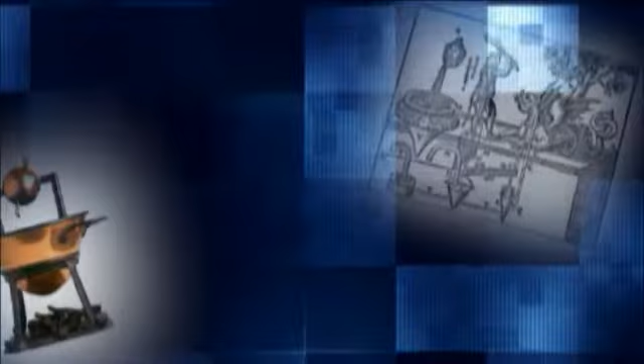Then, in the 1700s, through the work of Thomas Newcomen and James Watt, the steam pumping engine, and thus the modern pump industry, was born. Over the last 250 years, pumping technology has evolved to the highest levels of integrated engineering sciences.

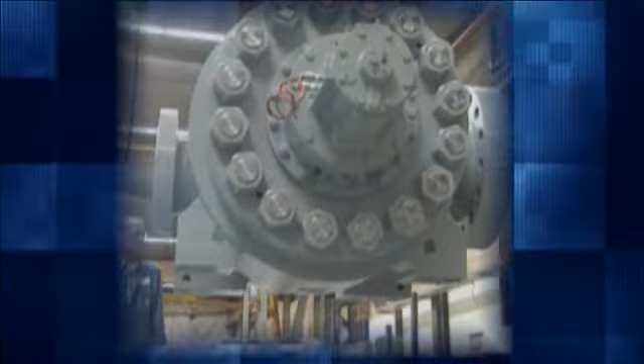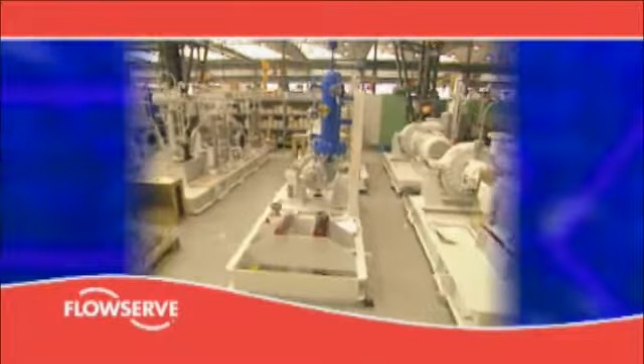If we go back and look again at the heritage companies, which are made up of a good many, the dominant technological skill in all of those companies has been hydraulics. We have a baseline of experience from which we can move ahead. So from that perspective, we're well positioned to move into almost any area of technology.

One of the great things about this company, especially when it comes to technology, is that we have several centers of excellence, which are virtual centers of excellence in various fields. Fluid dynamics is one. We also have mechanical analysis, mechanical design, materials, mechatronics. When anything happens in the field or a customer likes an advice or is asking for something, we are glad to give it, and we tend to step beyond boundaries.

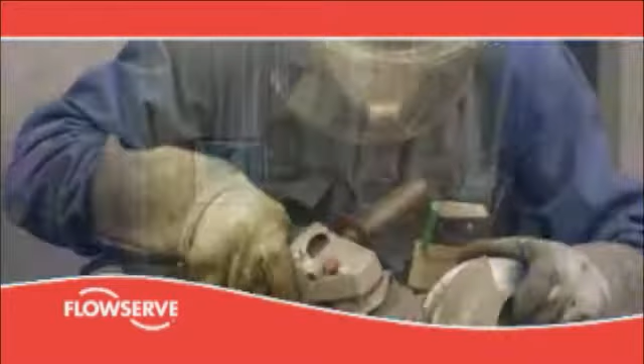The organization these men are talking about is Flowserve, one of the world's largest pump companies. Tracing its heritage back to 1790 London, Flowserve is the undisputed leader in pumping technology, with an exhaustive list of industry firsts to its credit. Most of the engineered pumping machines operating in the world today were derived from original design concepts developed by entrepreneurial engineers from Flowserve heritage companies.

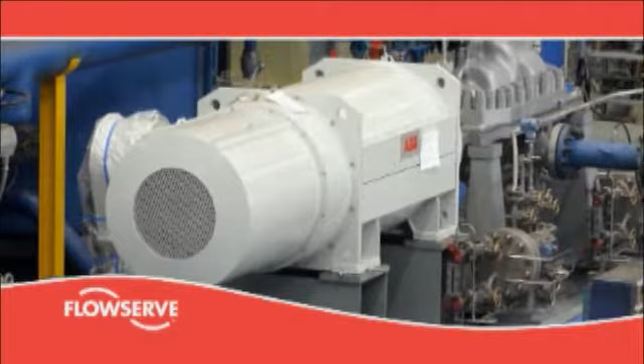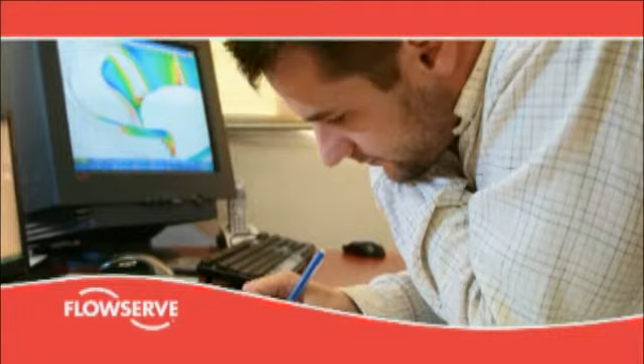Today, Flowserve continues to possess a passionate commitment to technology and innovation. In fact, it is one of the company's core strategies. Through its Applied Technology Group, this research and development expertise in fluid dynamics, mechanical design, engineering analysis, mechatronics and material science is now available to those pursuing creative, innovative solutions to pumping problems.

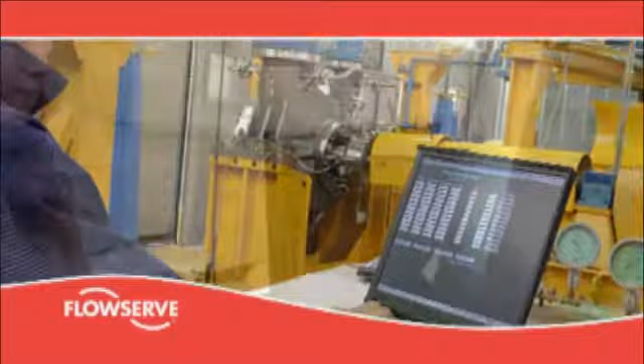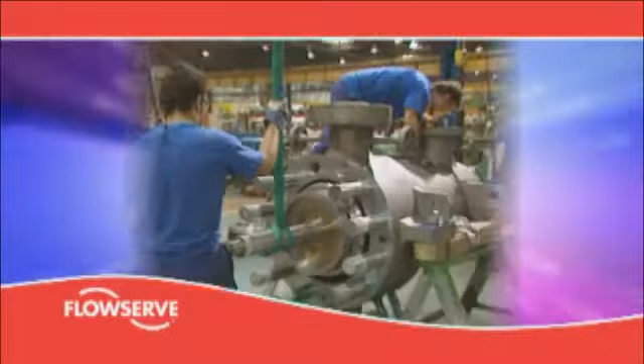If we look at high energy machines, higher speed gives you physically smaller machines. That poses its difficulty though, because you have to get the fluid dynamics correct, and you really have to get them very correct in order to run machines at very high speeds. The main field of interest nowadays is cavitation. It always has been in pump applications and still is. And CFD is a great tool nowadays to study that in more detail.

When doing a cavitation study or an analysis, we try to determine the shape of the cavity that will form. And from that cavity shape or cavity length, we will determine the amount of erosion rate that will come from it. So we know that after 1 year, 2 years, 3 years or 10 years time, we have a certain amount of cavitation damage or cavitation pitting. And that's exactly what the customer is interested in.

It often occurs that customers still require us to do flow visualization tests on high energy applications. Often what the customer wants to see is a limited amount of sheet cavitation to be sure that the lifetime of the pump is guaranteed. We can visualize when an incipient cavitation is happening, when the first bubble is formed, and then take actions to avoid that in the field.

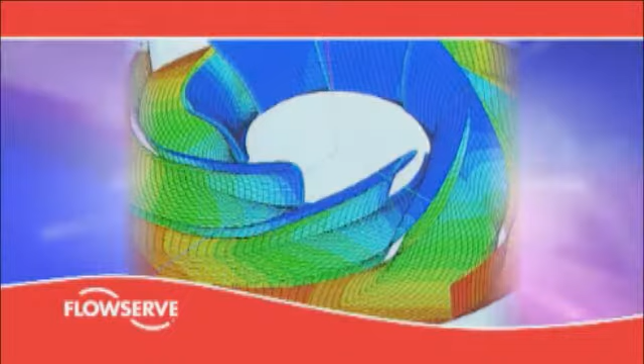We have now coupled the CFD tool with an optimization tool so that together it becomes a design tool. With this design tool, we use parameterized models for the pump impeller that we put into a CFD tool. We start by calculating the flow within a passage. We construct an objective function with the objectives we want to include, and then we try with cutting-edge numerical techniques like a genetic algorithm to minimize this function, so to get the best geometry out of the design space.

The adoption of genetic algorithms in the design process is very important because it enables us to deliver impeller designs that are unconventional and that no one has ever tried before. Customers want to be able to operate their pumps outside of the design envelope. It's whatever the demands of the plant require, and they will operate these pumps in ways that were never envisioned.

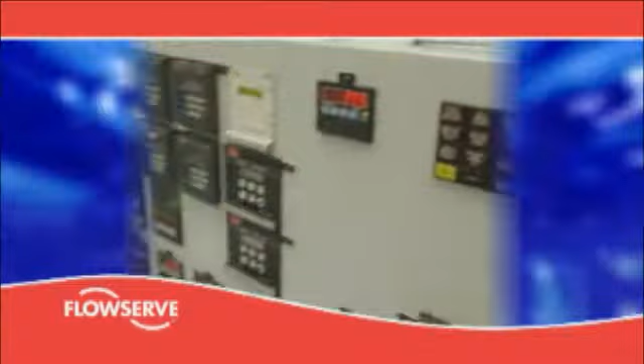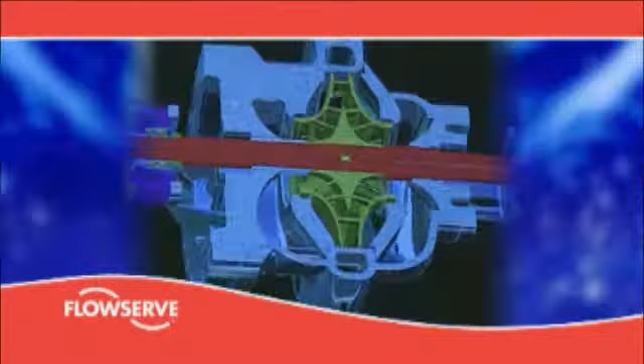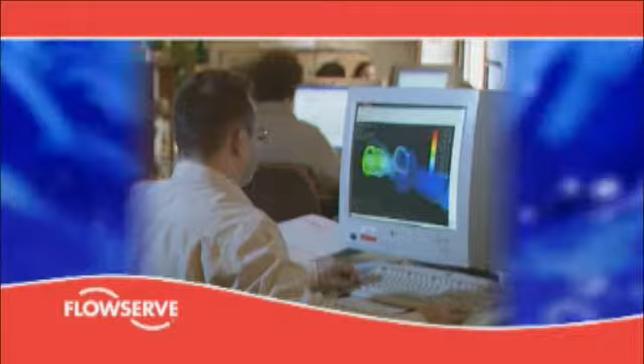The computational tools that we have available today in the company are for sure the necessary instrument to reach more severe limits for application on the highly demanding pumps. With 3D modeling and CFD, finite element modeling and so on, we can actually look at these design conditions in detail. We can actually model them and predict what types of vibration perhaps or stresses or instabilities in the flow may be happening.

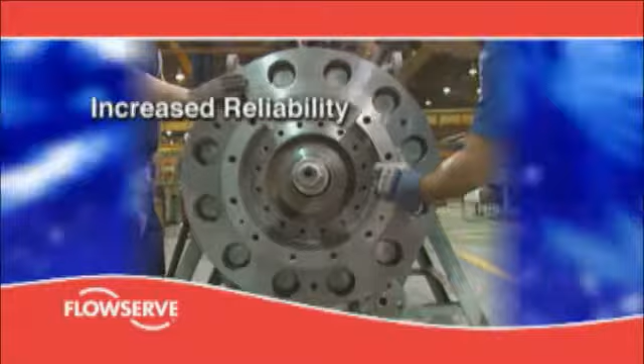We are looking forward to a better fluid dynamic design in order to reduce by 30% and more the weight of the pump and extend the mean time between failure to achieve a longer expected life of the pump.

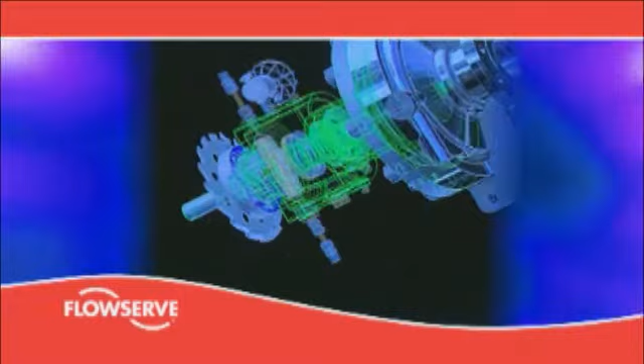The real advantage of 3D modeling is that you can check your assemblies. You can take any 3D model and put all of the loads on it, get stresses, deflection, vibration information, natural frequencies, determine if you're going to have certain field problems in advance, and then you can make modifications to that model and see how you've improved it.

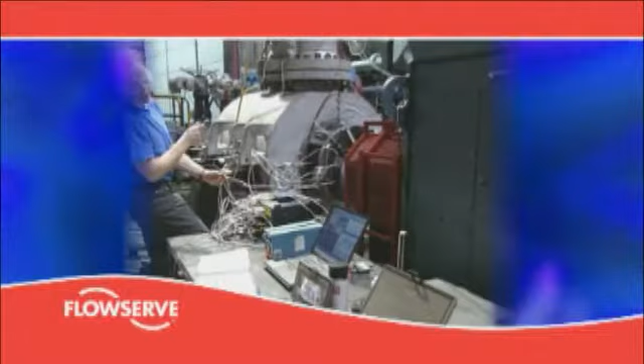All the vertical pumps that we design in our facility, we conduct a reed frequency analysis using rotor dynamics and finite element analysis, which confirms that no problem of that nature is going to happen on a site. That is one of the best things we can do for our customers.

Mechatronics is really kind of defined as a synergistic integration of a number of different technologies, and these include things like electrical, electronic engineering, mechanical engineering, sensor technologies, computer technologies, and actuation technologies. We as pump manufacturers know how the pump works really, really well. So people have tremendous experience in the industry to diagnose pump problems.

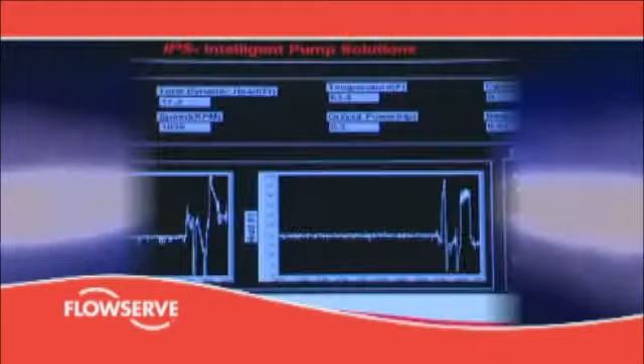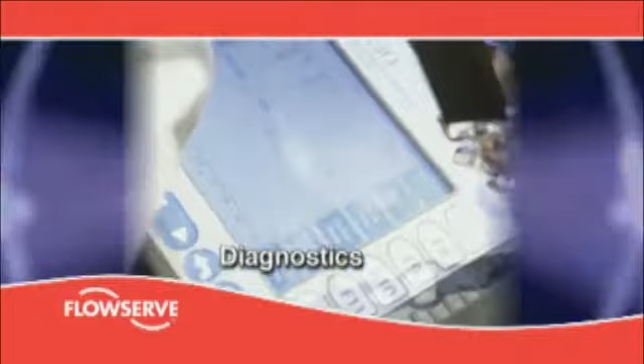With mechatronic systems, what we are trying to do is capture their diagnosis ability or capability to detect problems. We want to actually be able to embed the intelligence directly on our equipment such that the pump itself would monitor its own condition such that you will not have to go out and collect raw vibration data, for instance, from that piece of equipment. The piece of equipment can gather its own data, run its own diagnostic and prognostic algorithms, and give you information about the status of that piece of equipment.

So, end of the day, you come back to saying, what do I need to do all these things? I need to be able to monitor, gather, and collect data, which goes to the heart of the mechatronic system, which is instrumentation, and the ability to collect data and interpret data to the customer's benefit.

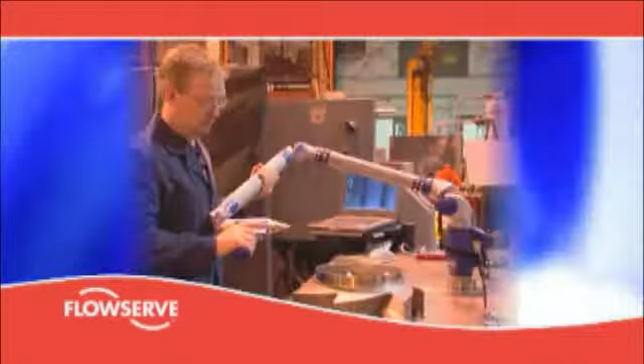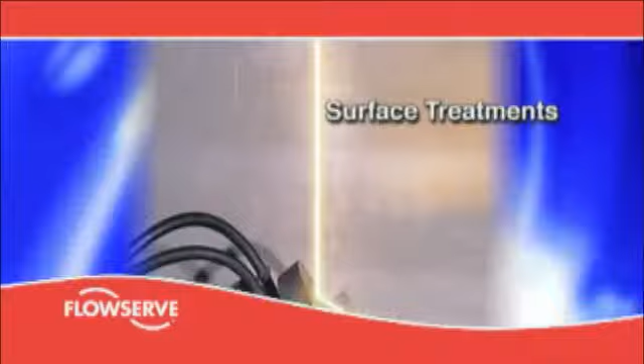Flowserve is a company that combines a number of different heritage pump companies that has brought to the table various approaches to engineering problems, to the use of materials and coatings. We're focusing today particularly on several different types of coatings and surface treatments, including weld overlays. Specifically, we're looking at various types of coatings that can be applied using a laser, including a tungsten carbide, which we believe offers considerable opportunities for the future.

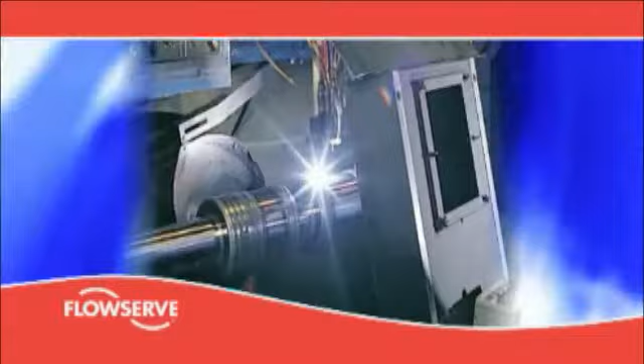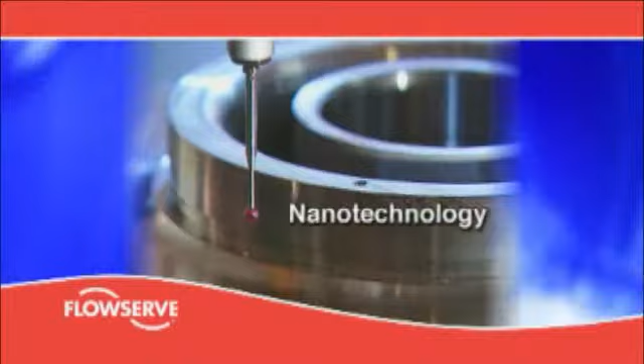There's a variety of surface treatments. Plasma coatings is probably some of the newest ones, where people are generating plasma gases so we can coat internal passages. In the coating area, there's a lot of developments going on, and in the HVOF, or high velocity oxy-fuel type process, suppliers now are making nano-sized powders, which gives us much better coating, a denser coating, less porosity, and that provides more benefit for wear resistance and corrosion resistance.

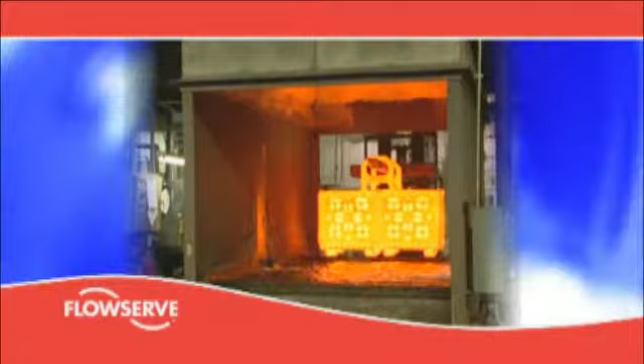A particular success that we've had in recent years has been a material that we developed known as X-Cavalloy. This is a unique stainless steel developed specifically for cavitation resistance. It's an austenitic type chrome manganese stainless steel that has cavitation resistance far better than all conventional materials that are used for pump components.

We're currently looking at materials and processes from various sources that are not currently being used, but we think with the right modification or improvement would represent something that would allow us to offer a better product suited for very severe applications 5 or 10 years from now.

These technology tools will help us step by step to be one step ahead of our competition. You're trying to improve the reliability of the total pump package, seals and pumps, and you're also trying to improve the efficiency of the pump. So that gives a cost reduction for the customer.

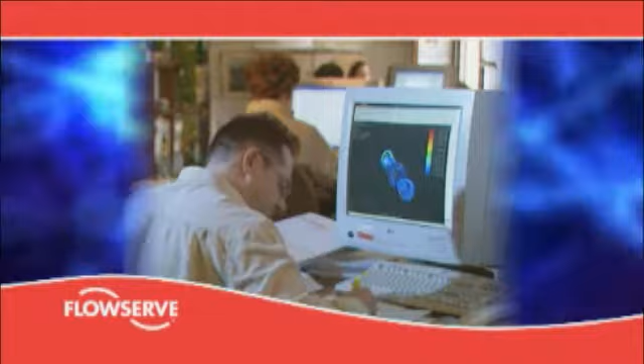We have a large group of engineers and advanced level engineers in our technology team that I think are some of the best people in the world. They're recognized by many of the industries. They participate on committees. They participate in councils. We drive many of the standards that you see as industrial standards. So our people are the kind that not only work for Flowserve, but they actually support the industry.

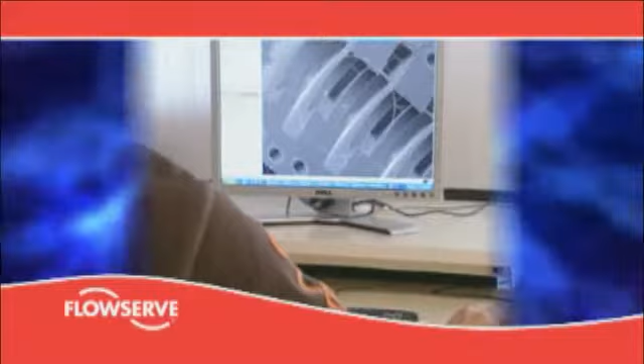There's no engineer here that has to go it alone. He can call up an expert and get advice any day of the week. It's great. It's great to be surrounded by experts from all over the world. The interactions with the people from different culture, different educational background, a different interest is very stimulating and will permit to synthesize the best approach for the best objective.